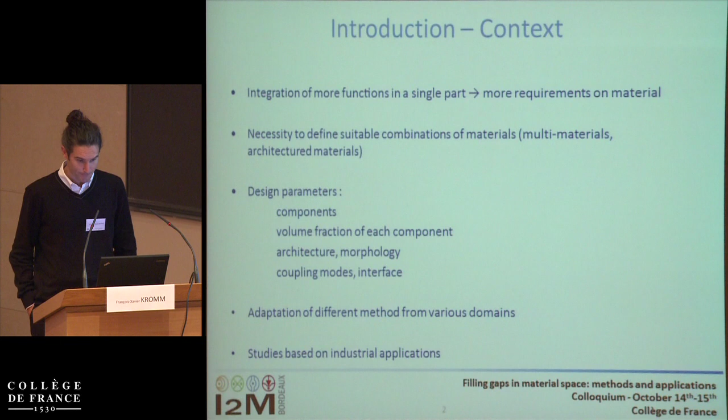Now the task is no longer choosing one material from a database, but determining several parameters: the nature of each component, the volume fraction of each component, the architecture of the multi-material, meaning the morphology of each component, and the coupling modes, particularly the interface.

The different studies we have carried out consist in adapting various methods from different domains to the design of these parameters. Each of these studies was based on an industrial application, which will be shown in this presentation.

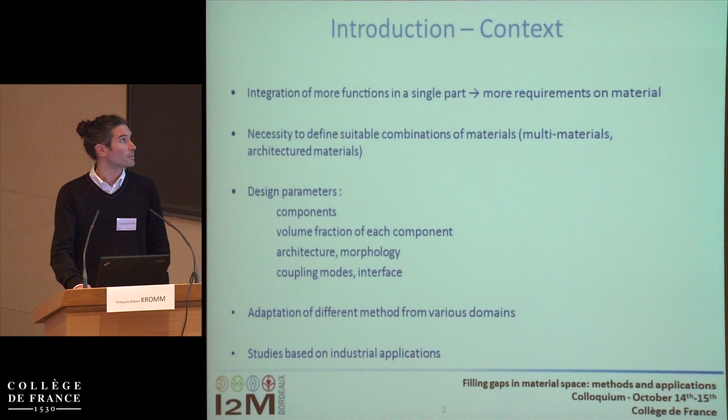Looking at the general design method, shown in green, this is a classical method which begins with the definition of customer requirements through the application. Using functional analysis, we can write a functional set of requirements, and if we know a principle of solution, we can define a material set of requirements. Then, using for example Ashby's classical selection method, we can find a material for this application.

In the case where there is no solution, we have to design a multi-material, meaning defining all the parameters we discussed before—shown in the blue square. This consists of defining functional mechanisms and the architecture, selecting the components, and modeling the behavior of the multi-material. All these tasks are linked, as we can see.

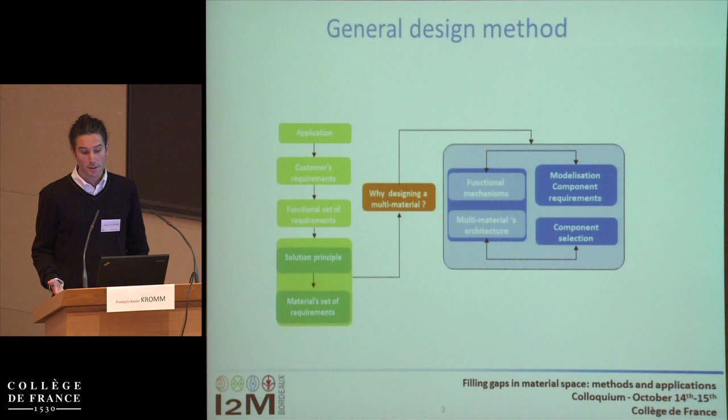In this presentation, the second and third parts will describe some studies concerning the design of multi-materials, within this blue square. But before that, we're going to look at a preliminary tool that has been developed to answer the question: why design a multi-material?

This preliminary tool is based on an analysis of the set of requirements. Often the answer to why design a multi-material is the incompatibility of the requirements, meaning the required properties fall in a hole of material space. This is due to the correlation between the properties concerned.

The first tool that has been developed, which we're not going to detail today, consists of evaluating the opportunity to find a material near the requirements—this involves discretization of the material space and evaluation of the population density of materials around the requirements. The other tool that has been developed consists of separating the set of requirements into two or more parts in order to separate the incompatible functions.

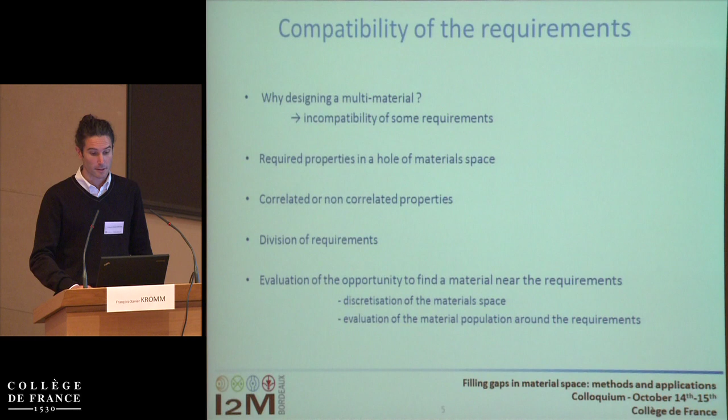This is the tool that I'm going to describe now. It is based on the principal component analysis method, which allows us to calculate a correlation coefficient by calculating the covariance of two properties on a database.

These correlation coefficients are the terms of the correlation matrix, and by defining the principal axes of this matrix, called factorial axes, we can find an axis which minimizes the inertia of the series of points—in our case, the points represent a material in the property space.

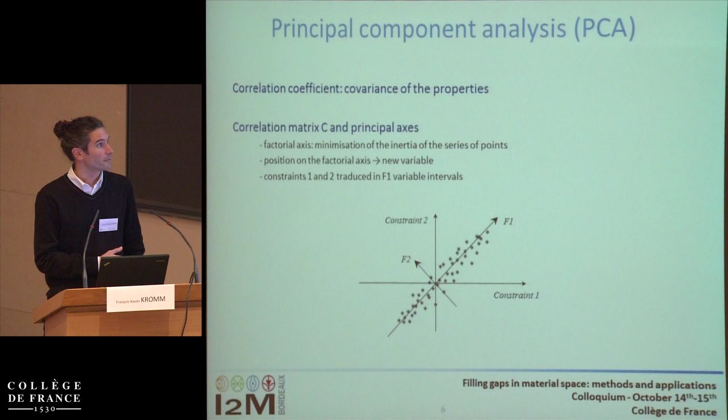So the interest of this method is that, using this, we can describe a material through its position on this factorial axis. We have only one property to compare for different constraints, as shown in the graphic at the bottom.

This is quite simplified, but all materials are characterized by their position on the axis. Two cases can happen. Suppose we have a property P1 which has to be superior to a value P10, and a property P2 that has to be inferior to a value P20—a fairly simple case. There are two possibilities.

The intervals can have a non-void intersection, so this interval will characterize a population which can be a solution. But in the case where there is an incompatibility between the requirements, the intersection of the two intervals is void, and this method allows us to define the distance between the two intervals, which we call the distance of incompatibility.

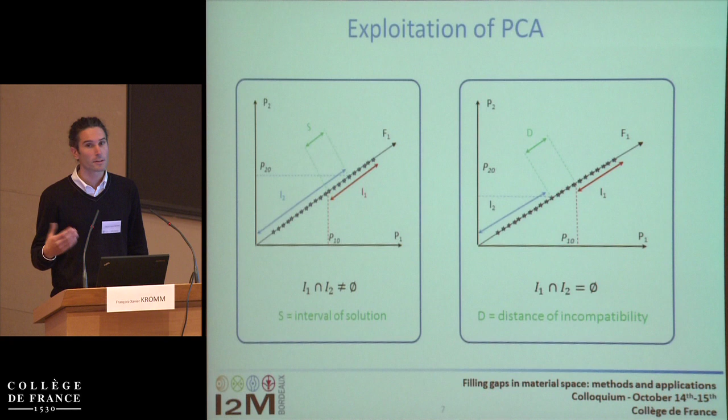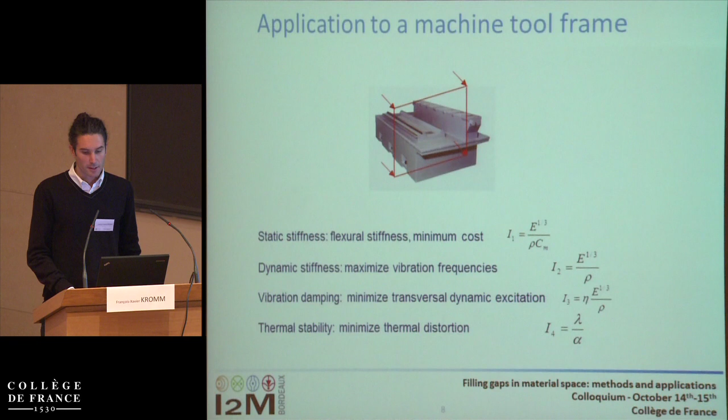This tool has been applied to the case of a machine tool frame, whose set of requirements consists of different points like static or dynamic stiffness, vibration damping, or thermal stability. For each case, we can derive a performance index.

The aim of the study was to replace the reference material, which is a cast iron, with an objective of a 5% increase in performance. The correlation matrix was calculated for the different combinations of properties for each point in the set of requirements.

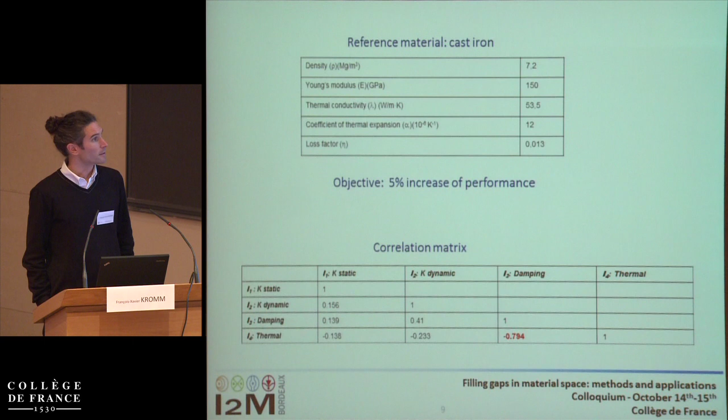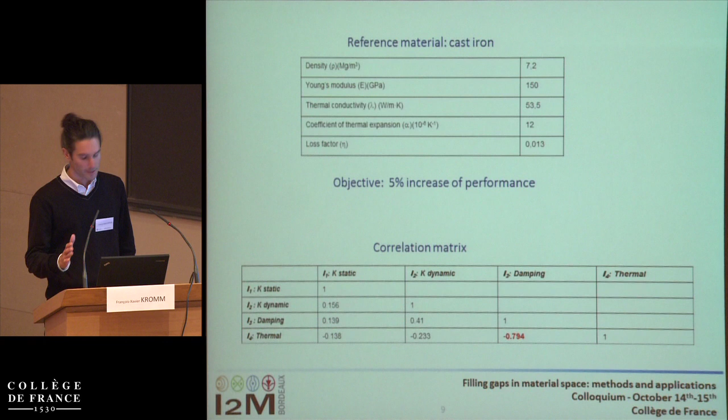The correlation coefficient is generally between -1 and +1. We can see that all the terms near zero show low correlation, except for the value concerning the thermal and damping performances, which seems to be correlated. So it's interesting to develop these two points to see if there is a solution.

In this case, the different criteria have been applied, and we can see that the allowable interval of value on the factorial axis is empty. So the distance of incompatibility has been calculated, and we can see that it's about 10% of the whole range of materials, so it's quite important. It was unnecessary to try to make an evolution in the level criteria. We wouldn't have found any solution.

This resulted in a separation of the incompatible functions, which were thermal and damping functions, into two different sets of requirements. Then we proceeded to a classical selection of components, which resulted in polymer concrete for this application.

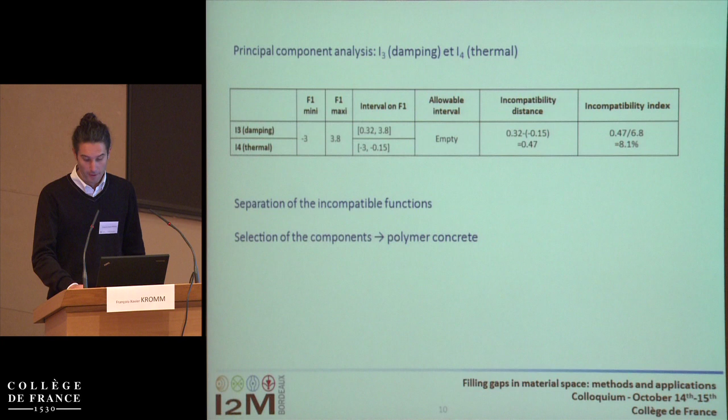We can summarize the benefits of this method by saying that, although we didn't detail it today, we can study the density of materials population in the space to see that we have some opportunity to find a material to fulfill the required properties. We can explain the failure for a material selection, and then separate the different incompatible functions into different sets of requirements, or we can evaluate the distance of incompatibility to see if a small variation of the criteria can benefit.

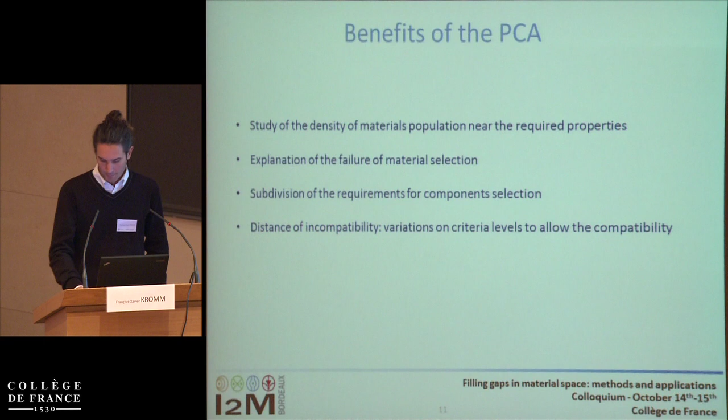So after this preliminary tool, which was on sets of requirements, we're going to see two different tools for multi-materials design. The first one consists in a filtration method. As we said, defining multi-materials means defining all the parameters we have already mentioned.

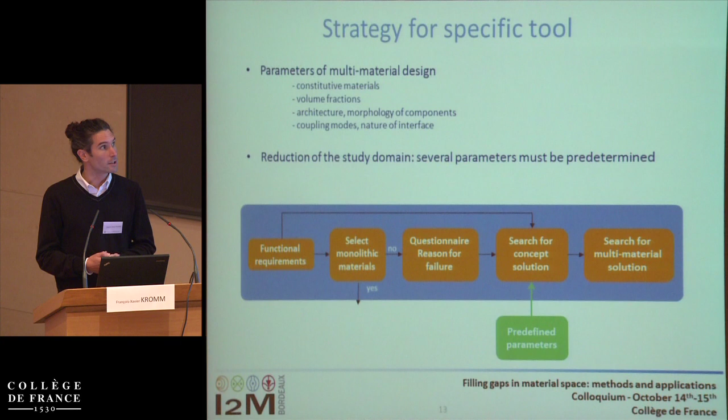In our case, the number and variety of parameters is too important to deal with all at the same time. So we decided to have predefined parameters corresponding to such a concept of solution. That's how we call this, in order to develop a method to find the optimum parameters that remain free.

In the first case, we're going to consider that the coupling mode is already known, because we suppose the interface between the two materials, 2 or 3, is perfectly bonded. And we suppose the architecture is known.

In the next example, we will consider a multi-layer material. So the remaining two parameters are the constitutive materials and their volume fractions. For the selection of constitutive materials, there are classical methods to choose one material, but when dealing with combinations of materials, the number of possibilities increases greatly.

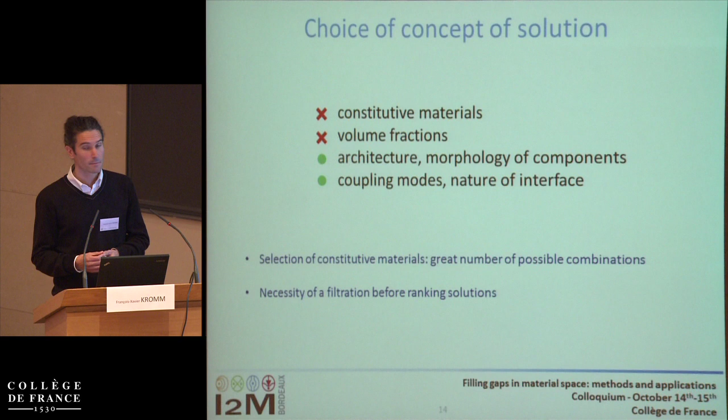So this shows the necessity of a filtration before ranking the solutions. In this case, as we know the architecture, we can find behavior models for the multi-materials. And thanks to functional requirements, we can define requirements for the multi-materials.

The different steps of the filtration will consist first in searching for possible materials for each component, then searching for possible combinations of materials, and then, within these possible combinations, seeing if we can find possible volume fractions to fulfill all the requirements. Then we'll proceed to the ranking of the solutions.

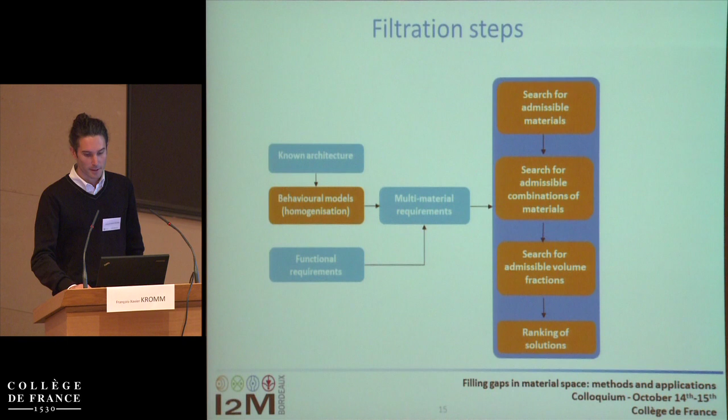The filtration criteria are defined by the analysis of the requirements by couples. Taking the requirements by pairs, we can see that sometimes no materials can fulfill both of them, and that will define a filter for us. We can find a very simple case when, for example, one requirement needs an important thickness, like high stiffness, while other requirements require low thickness, such as a limited mass or cost.

In this case, when we have antagonist requirements, we can define a filter, each time we have two antagonist requirements. So the rule to search for possible components is that, to be a component, a material must fulfill at least one filter, and each filter has to be fulfilled by at least one of the components. This allows us to define the possible materials to be components, and the possible combinations of materials.

Then the calculation of valuable volume fractions makes another filtration on the possible combinations, and is done thanks to constraint optimization software. This tool has been developed on a simple example first, and then generalized to any number of constraints and free variables.

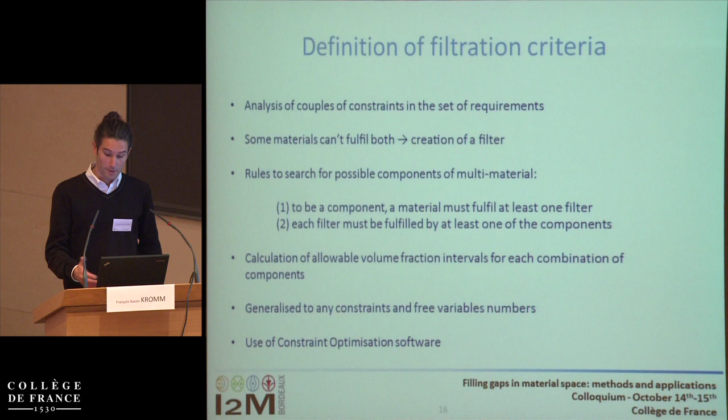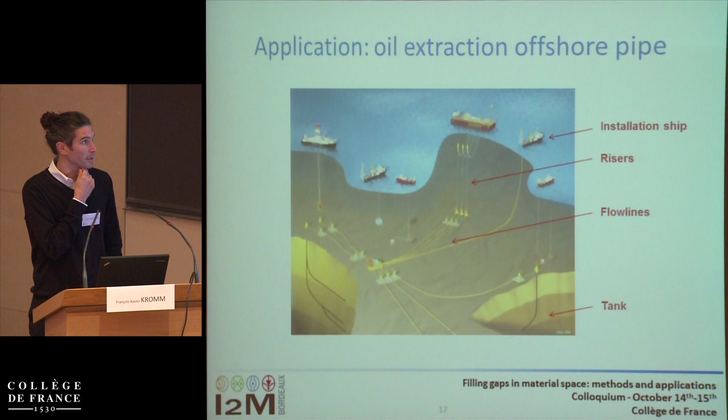To illustrate that, we have applied it to an oil extraction offshore pipe. These pipes were the flow lines, which lie on the ground under the sea at great depth. The set of requirements dealt with the exploitation and extraction of oil when it's under the sea, but also the installation, so the transportation on the ship.

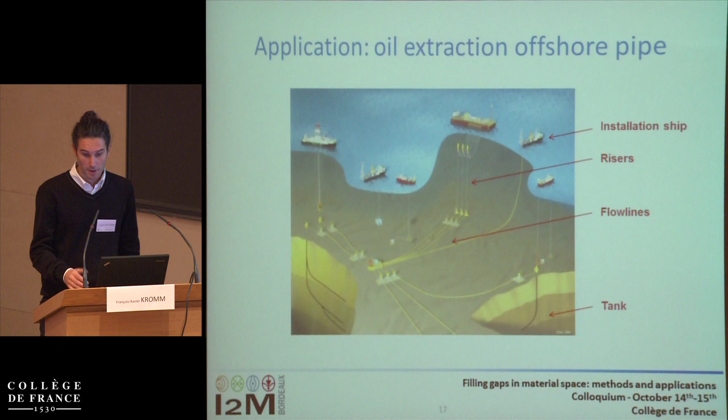The assumption was that the material was a multi-layer and axisymmetric structure. The free variable was the layer thicknesses, and the database we used was only 62 materials, which was voluntarily reduced in order to illustrate this method.

But we can see that, considering only 2 components, we already had theoretically more than 3,000 possible combinations. So that shows the necessity of a filtration before ranking all the solutions, in order not to evaluate all these combinations.

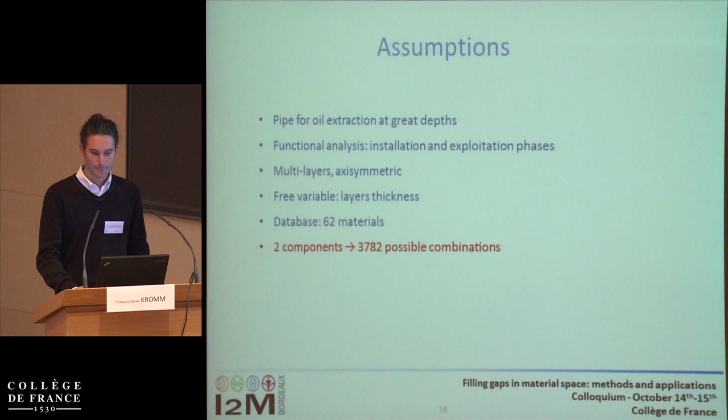The set of requirements has been separated into different groups. The first two groups were constraints independent from the free variable, so from the thickness, and concerned the internal and external layer. There was essentially a service temperature requirement, for example.

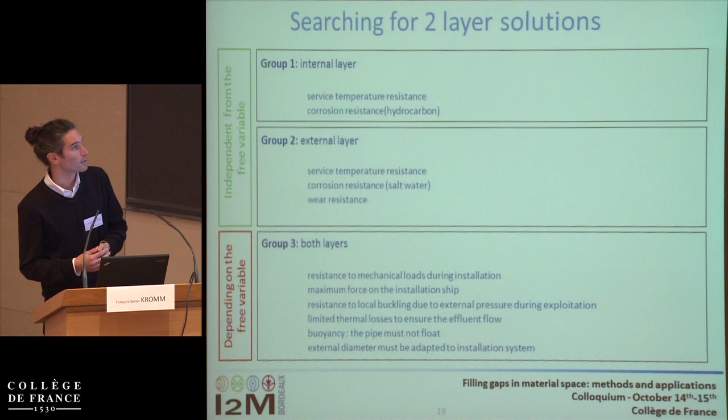The third group concerned both layers and was depending on the free variable. It was about mechanical resistance, so the load exerted on the installation ship, and the thermal insulation, for example.

The application of the method shows that first, applying the two first groups of constraints, the number of materials, which was 62 for each layer, is now only 18 for the internal layer and 14 for the external layer, which results in...

252 combinations. Then applying the filters as we described them in order to search for possible combinations of materials, we only had 8 combinations remaining. Then for each one, calculating the possible volume fraction to fulfill the requirements, we only have 5 combinations. So with simple calculations, we reduced the combinations just by filtering the database.

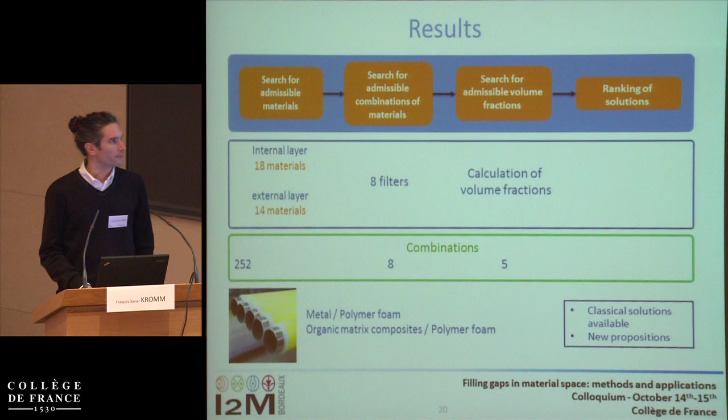We reduced the number of possible combinations from more than 3,000 to only 8, which is interesting in order to evaluate each solution. The result was that we found the classical solution, made of metal for the inside and polymer foam outside, and found the interest of a new solution developing organic matrix composite for the internal layer.

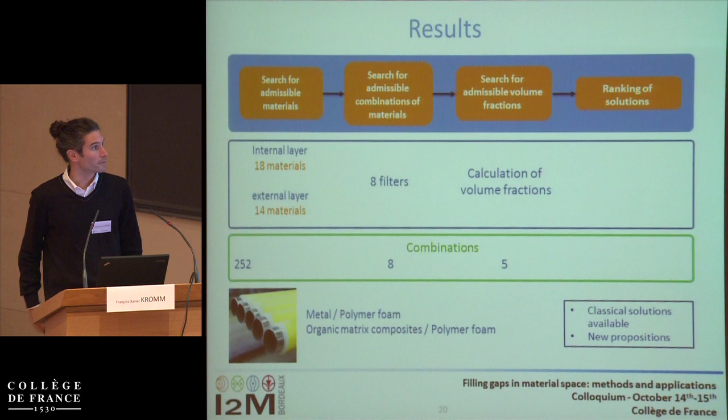Then the last tool presented today concerns the architecture selection. Considering the different parameters of the multi-material, this time the coupling mode is always supposed to be perfectly bonded, but now the constitutive materials are known, and the free parameters are the architecture and the volume fraction of each component.

This study, which is always under development, begins with the definition of an architecture database, which is not simple because we have to list a representative architecture with the associated models, and we have to make a hierarchy.

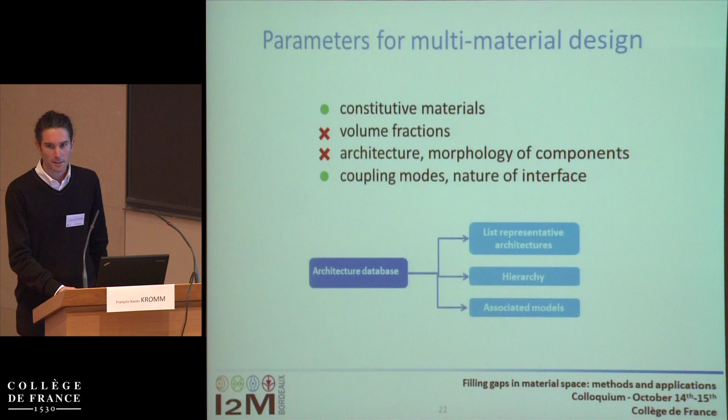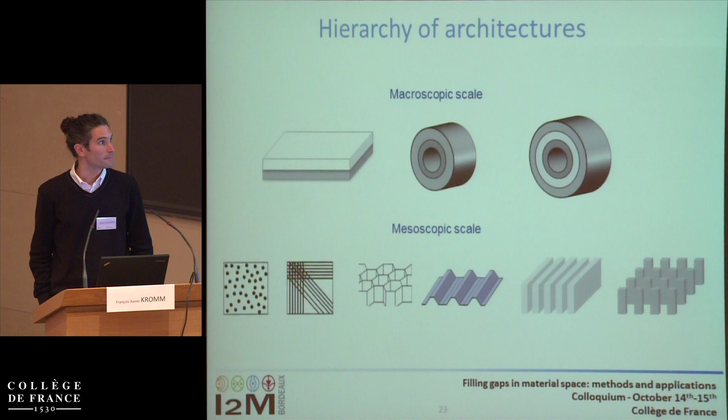This is a term that appeared several times today. We have to make a hierarchy, as we saw before, as a function of the different scales where the architecture is applied. So we will have macroscopic scales, for example in our case to have a multi-layer material, either axisymmetric or not, and then mesoscopic scale with particulate, fibrous, honeycomb or fins, for example, to fill these different layers.

So once this architecture database is built, we can proceed to the selection and comparison of architecture thanks to the component properties. This task is under development, and it will be interesting to compare very different architectures, as we saw in the illustration of the database.

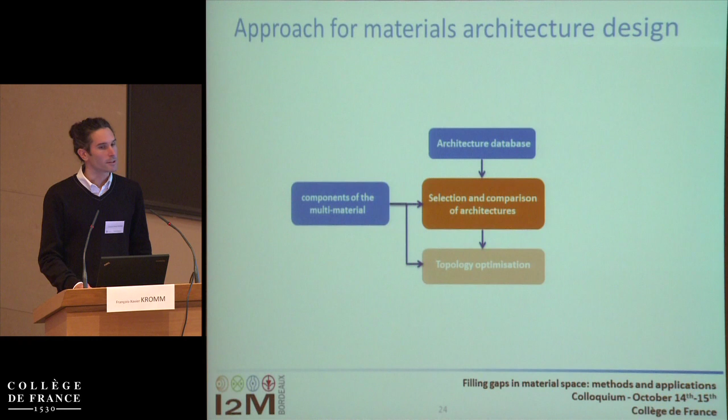There are some other approaches that we will see probably today, but in our sense we are trying to compare this architecture thanks to the models that have been collected too, in order to have a first selection and then apply topology optimization in order to have a small variation on this architecture.

This study is based on an application which is an electronic packaging for aerospace, which is a box that will contain an electronic board and whose functions concern protection from mechanical impact, from electromagnetic solicitation, and which must allow the temperature of the electronic component not to be too high. So it must allow the evacuation of the heat.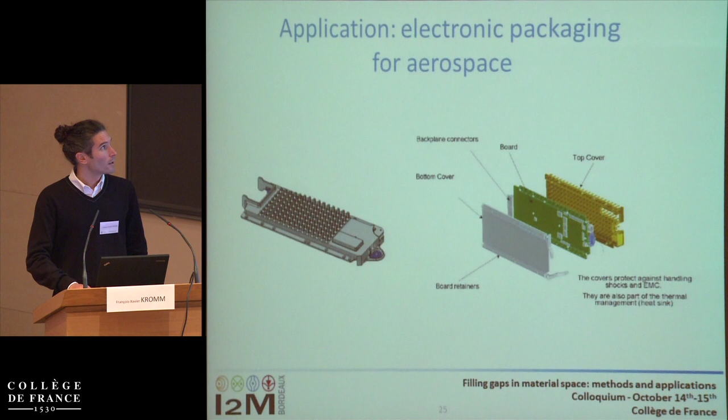Concerning this study, the further development will be the simultaneous selection of materials and architecture, which will depend on the resolution algorithm that will be chosen for the architecture selection, because it will add more parameters.

Then it would be interesting to consider the coupling mode, so the nature of the interface, but this is quite complex in our case, because we need analytical models to evaluate the solutions. The interface problem will probably involve complex behavior and taking into account problems of junction or contacts, for example. So for the moment, we didn't deal with that.

Then it would be interesting too to integrate the manufacturing process into this design, because it greatly influences the behavior of the multi-materials, and it's always a big problem for multi-material design.

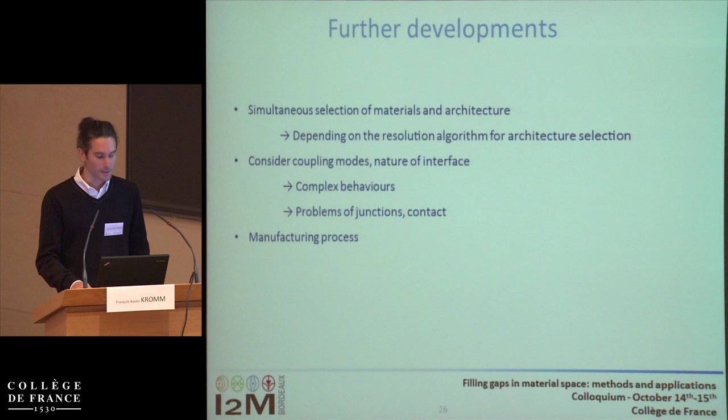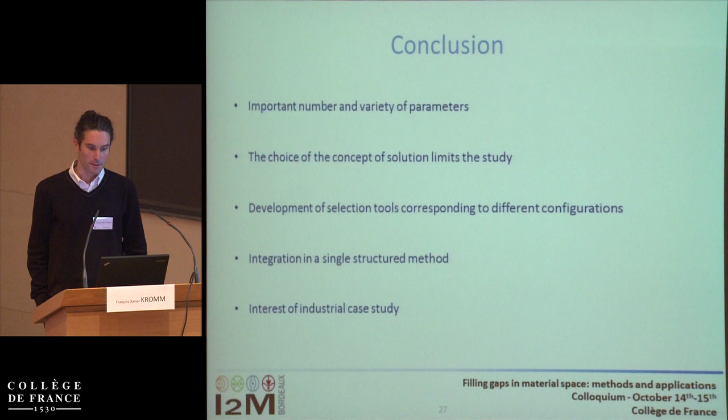As a conclusion, we can see that designing multi-materials deals with an important number and variety of parameters, and so we have chosen some concepts of solution. We decided to define parameters in order to limit the study domain and to develop tools corresponding to each configuration, which was defined this way.

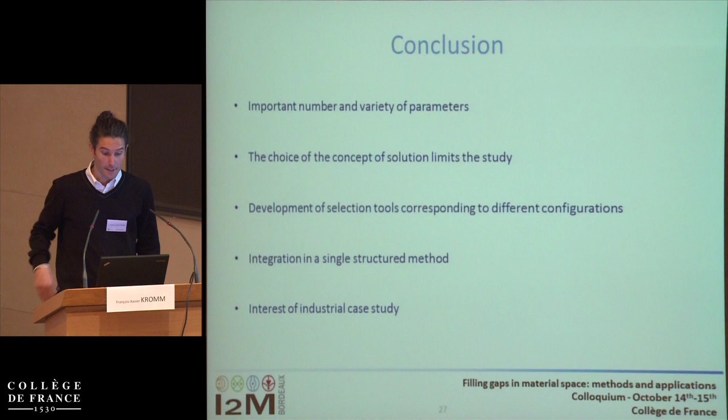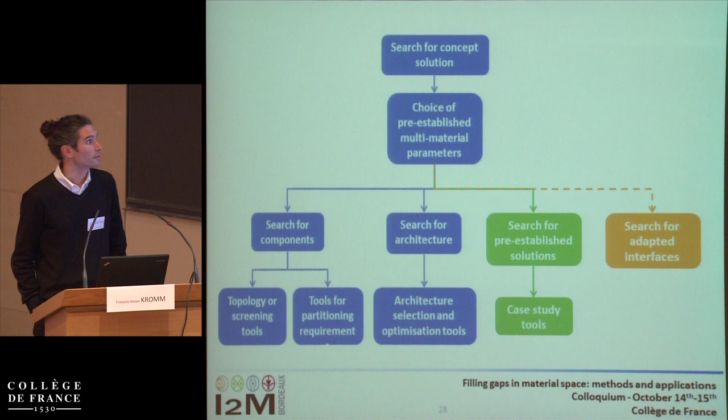All of these were based on industrial case studies, and this can be summarized in a structured method, which can show in which case we can use the tools that have been developed, whether we search for components or architecture.

Something we didn't talk about was the search for pre-established solutions, which can be a possibility too if we have a case study database with already existing solutions to a problem. Then the search for adapted interfaces - we didn't work on this, but I think we will see tomorrow a presentation on this, which will be interesting.